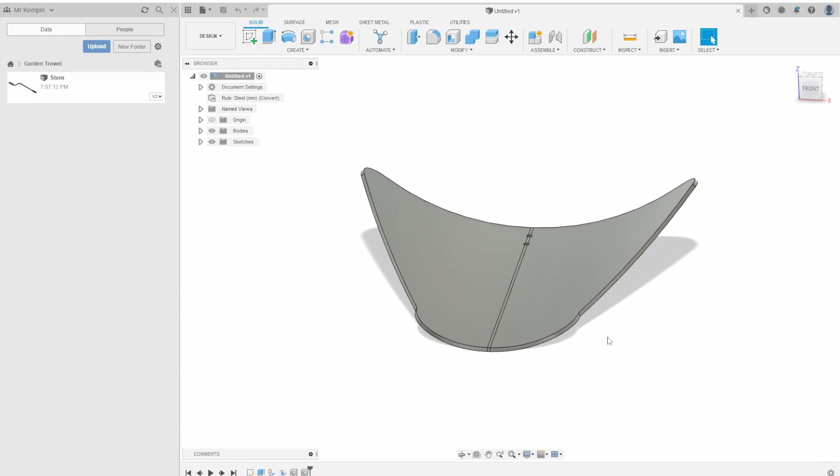This is the second video in the Garden Trowel tutorial videos for Fusion 360, and in this video we're going to be making the trowel blade, the part you see in front of you here. This is going to be one of the more complex parts as it involves using the sheet metal functions of Fusion 360 and incorporating some bends and curves into it, which we're going to edit as well.

So I'm going to start off by creating a new part, and the first thing I'm going to do is save it. In my Garden Trowel folder location, I'm going to call this trowel blade and save that there.

So we're going to jump straight onto the sheet metal functions, and we're going to start a new sketch just like we've done before. I'm going to use the plan or top down view.

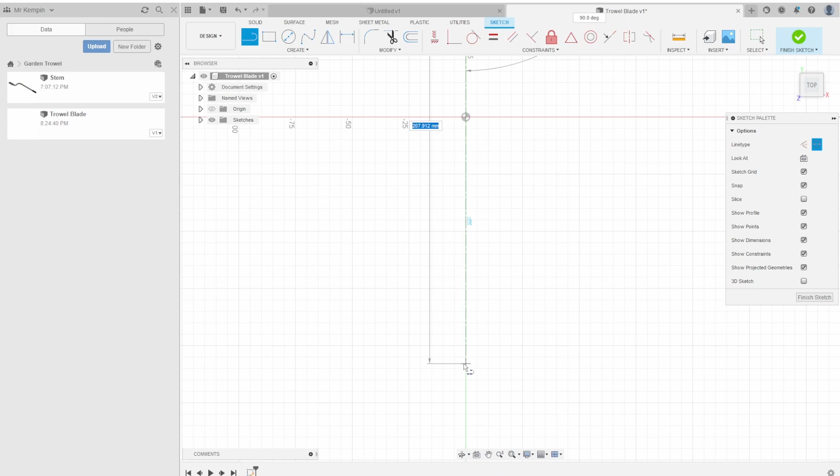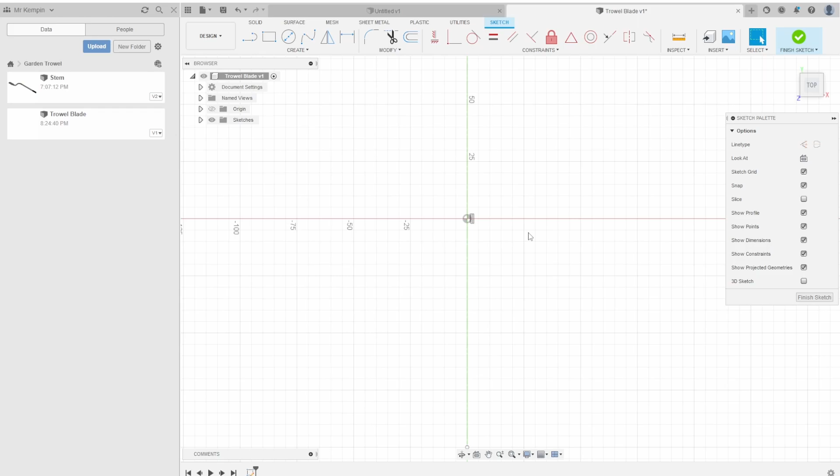The first thing I'm going to do is put in a center line. Using my line tool and selecting center line, I'm going to draw an oversized center line, way bigger than I'm going to need, and place it there. Now I find it very helpful a lot of the time to use the central coordinate system, where the three planes intersect, and I'm going to fix this line to that central axis. So right click on it and press fix/unfix. By doing that, no matter what we dimension to and where from, this line will always remain on that central axis, or aligned to the central plane.

So we're now going to draw the outside frame of the blade. We'll use the rectangle tool and draw a rectangle there, making it 140 across and 145 down. It's not centralized, and that's fine, because our dimension tool, pressing D or selecting up here, from the central axis or center line to the outside line either side. But you notice it says 121.262 when I've only gone halfway, and that does not look like 121.

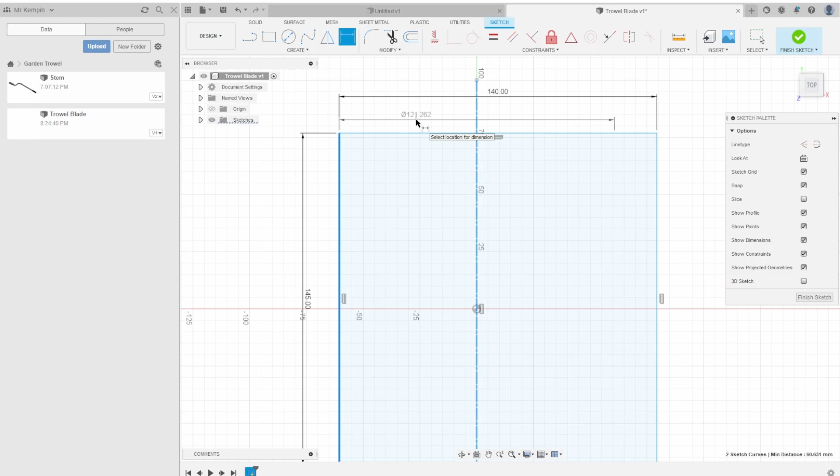But if you come over to here where it's measuring to, it's showing you that it's measuring the diameter, and you've got the diameter symbol there. So the center line will act as the central axis of whatever it is you're drawing, and any measurements to it will assume outer or total width rather than just center width. So I'll press that as 140, and as you can see, all my dimensions line up. 145 I can leave the same.

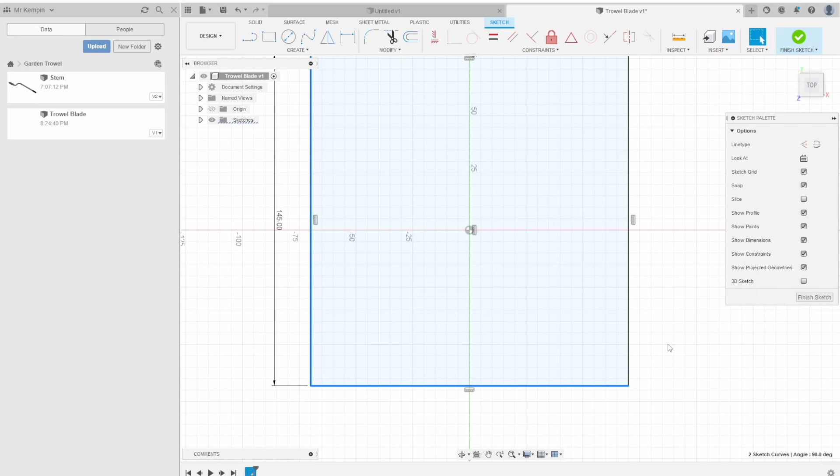I can exit that. I'm now going to click on each of these lines, holding shift in between clicking so I can select multiple lines, and I'm going to select construction over here, so those three lines are going to be construction. The top line will leave as a normal line.

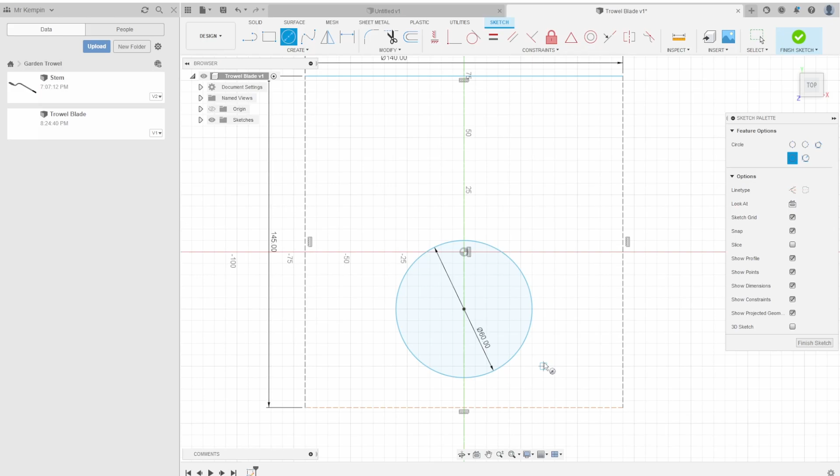I'm now going to jump into my circle tool. I can press the letter C to shortcut that if I want, and I'm going to draw a circle with a diameter of 60, starting the circle on that central line there. Then I'll press my dimensions tool or D, circle to bottom line, and I want this to be the same as the radius, which is 30, and that brings the outside perimeter in line with that bottom construction line.

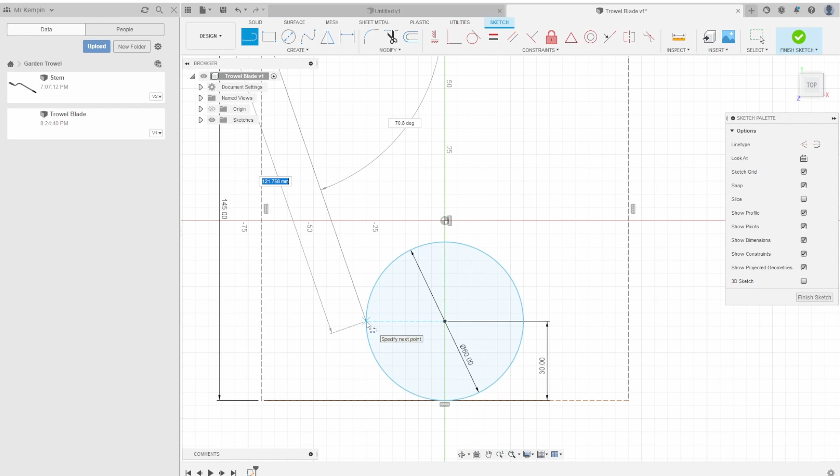I'm going to select my line tool and go from the corner here down to the center, and it should be in line with the center. For some reason it's not showing me in line with the center, and I can't... oh, there you go, now it's allowing me to snap to it. Sometimes you hover across to the center point there and then bring it back, and it allows you to snap. Same on the other side, and because I've got one line on there, it's definitely going to allow it to snap. If this is ever an issue and you can't get this on there, you can use a construction line from the center across to the outside, and that'll give you a point to snap to as well.

We're now going to go to the fillet tool, and we're going to fillet these edges around here to make them nice and round. I'll select that one, and that one, and I'm going to choose 10mm for my fillet, and it does both of them at the same time. I'm going to press the letter T, the trim tool, and trim off these two parts there. That looks like the main shape of our blade in flat form.

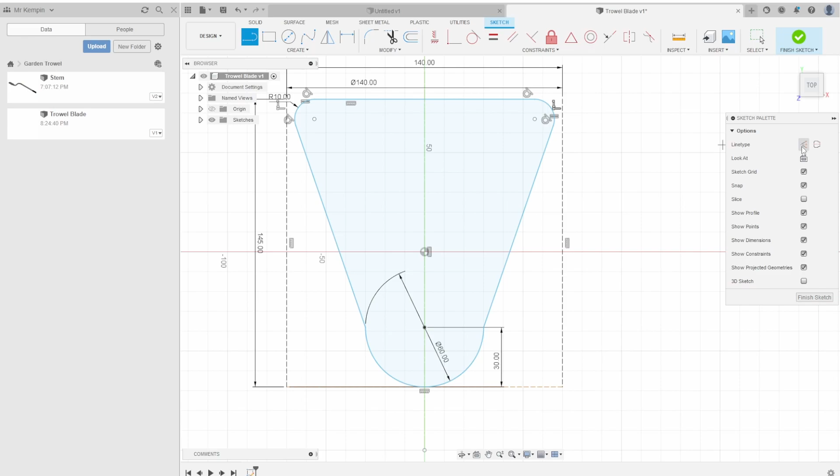However, what we still need to do is add two more center lines, one either side of that center line we've got there, and the reason for that will become apparent when we start doing our bends. So I'm just going to draw them, it doesn't really matter where, as long as they are perpendicular, so parallel to the center line.

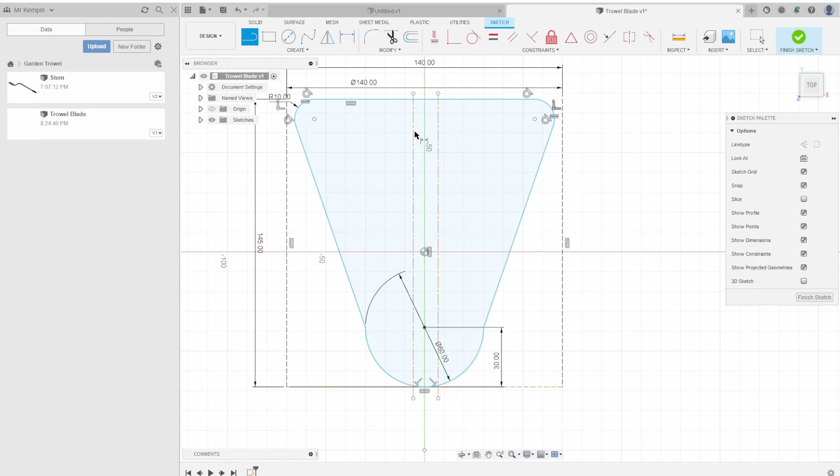And then I do another one over here. They're 90 degrees down, parallel to the original center line. And if I dimension them to the center line, I want them to be a dimension of 1mm diameter. And the same on this side here.

Here we have center lines that are 1mm apart, because the diameter from the center line is 1mm, so the radius will be 0.5, which is that distance there.

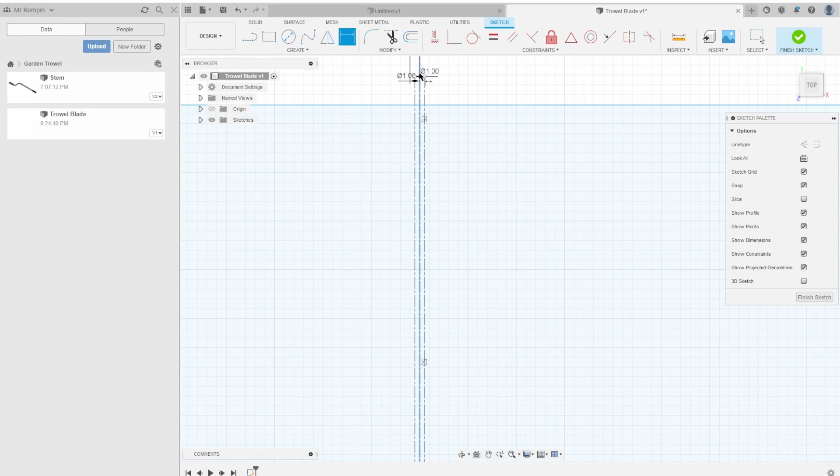I can now exit my sketch and extrude that, and because I've got all these lines here, I need to select all 4 parts. But instead of going up, I'm going to do -1.5. The reason for this is I'm going to make my sketch visible again after this, and I want to keep it visible on the top surface because I'm going to be working on that surface.

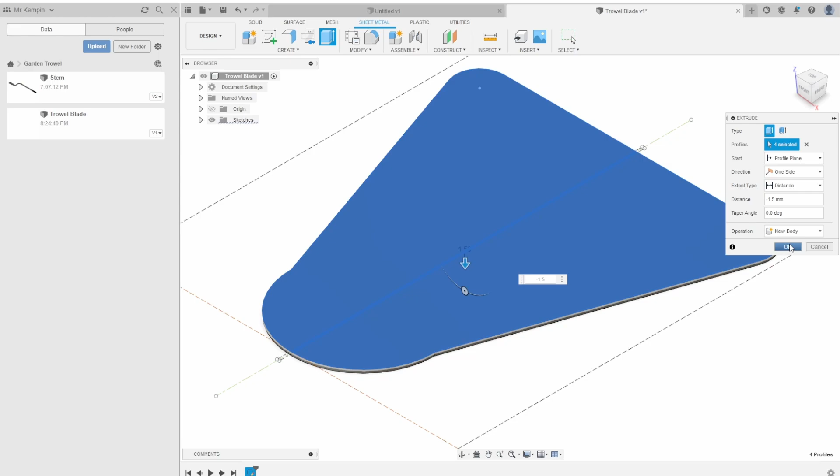So press OK. I need to press create and convert to sheet metal. I'm going to convert this body to sheet metal, and that means the computer is going to recognize it as a piece of sheet metal and allow me to use features such as bends and folds. So it knows I'm using steel, that's the default selection, and it detected a thickness of 1.5.

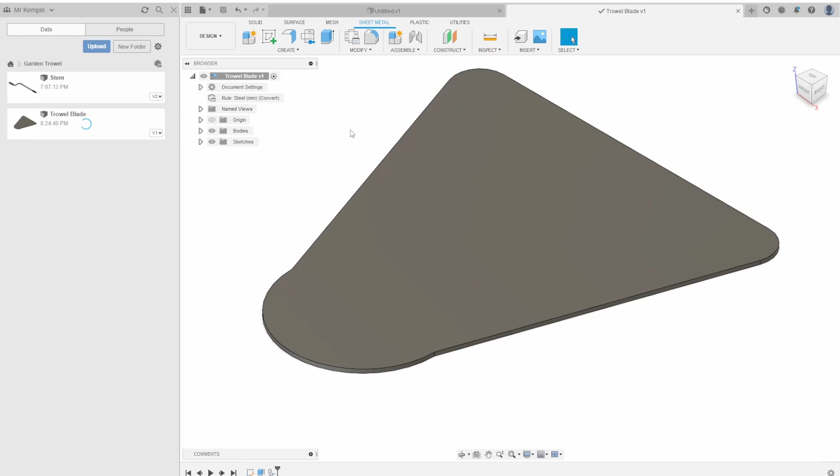Before I go any further, I'm going to press save because you don't want to lose any unsaved progress. So in the sketches, I'm going to make that sketch visible, and that's going to be really helpful for us.

I'm now going to press create and go to bend, and stationary side. Here's the really important bit. Zoom in and click in between these 2 outside center lines. This is really important, we have to click in between them.

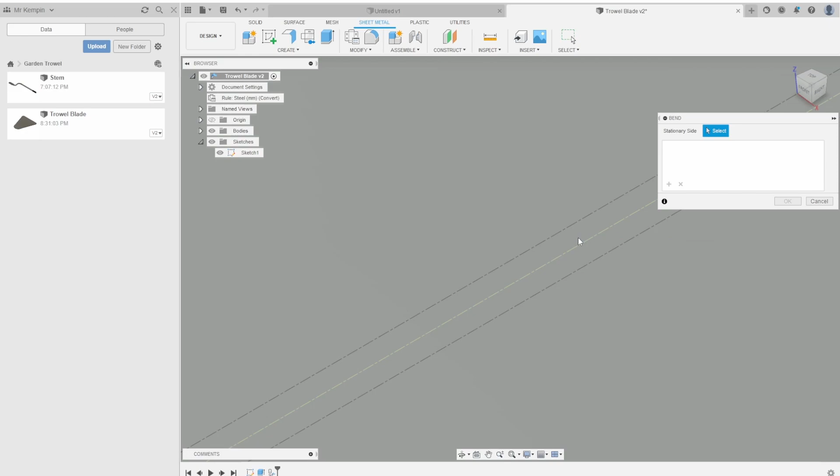It now wants us to add a fold, so I'm going to select one of these lines, it doesn't matter which one. I've selected that one, and you can see how that's bent up at a nice 90-degree angle. Looks very nice and neat, but that's not what we want.

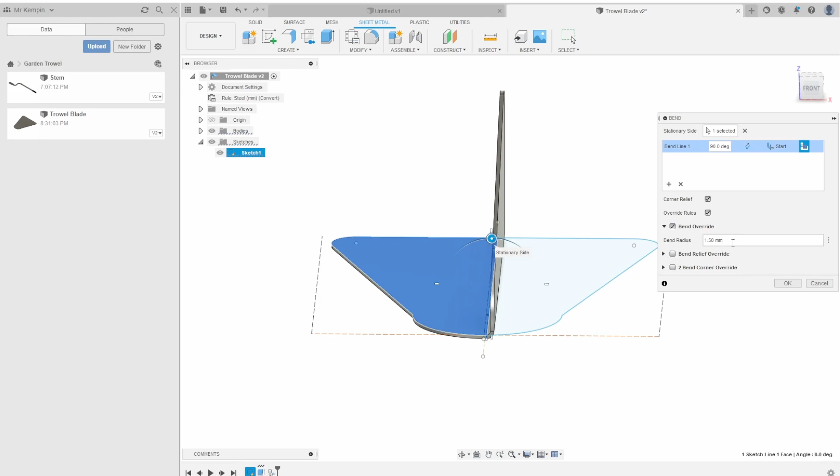I'm going to go to override rules and bend override, and change the bend radius from 1.5 to 88.35, and that gives me a nice sweeping curve.

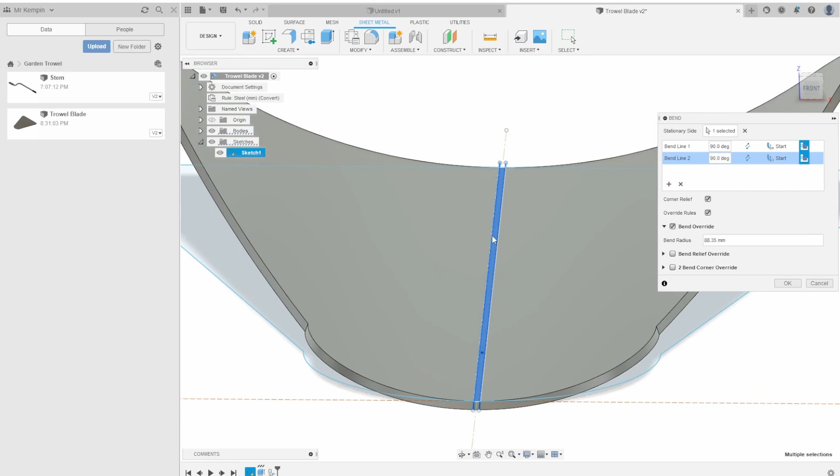I can now add a new selection, and I'll zoom in so you can see. I'm going to put the second bend on this line here, and this is why we selected in between those 2 bits for our stationary side. This flat piece here is staying stationary. That's really important for us because it means we're on the same axis and everything is nice and smooth.

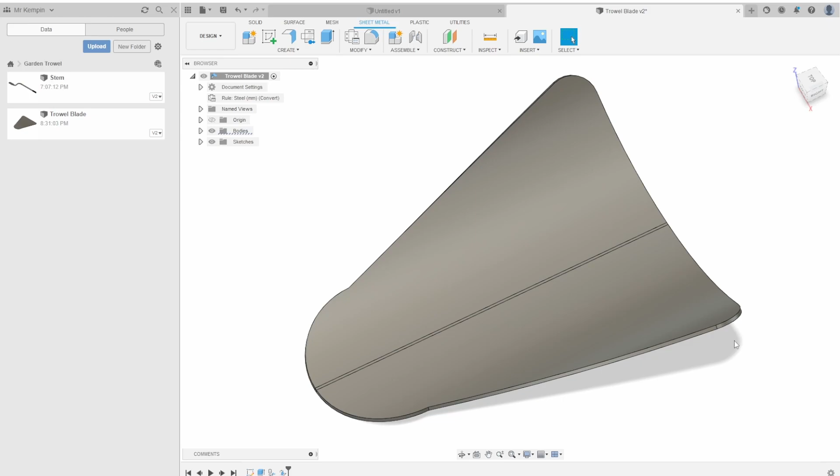I can press OK, and I can now hide that sketch again because I don't need it anymore. And that is the main bulk of what we're doing, done. However, we do need to put 2 holes in it. We want 2 holes here and here so it attaches to the stem.

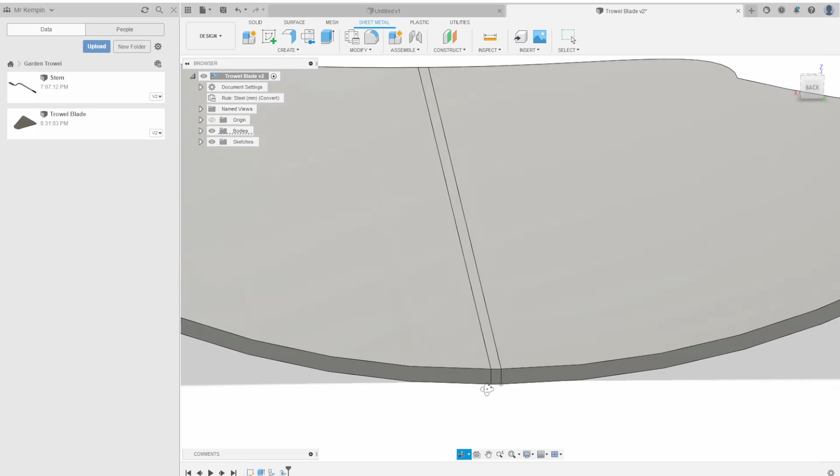I'm going to use the back here to insert the holes. The reason for that is if I insert the holes from the top part here, because it curves up, some of the material will sit above where the hole starts and not be cut away.

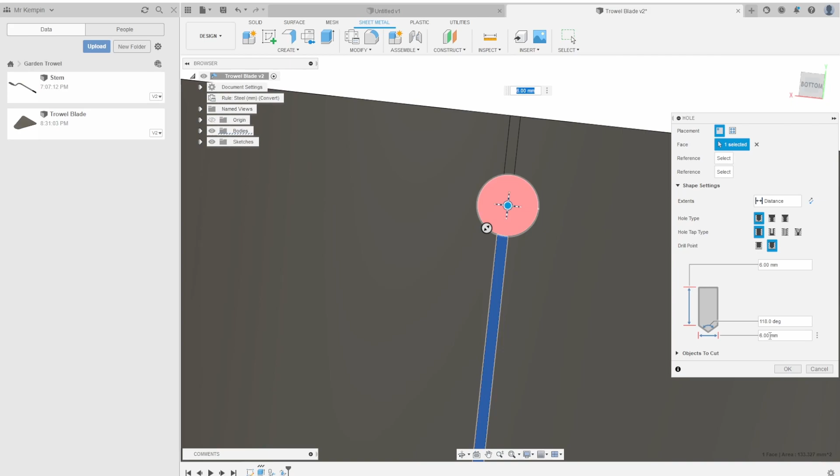So I'm going to rotate round to here, and use the hole tool, so create hole, or the shortcut letter H, and on that surface there I'm just going to click. Like in the video before, let's preset the size of this, so I'm going to set this as 2mm diameter.

Distance to all, and then I'm going to go for my references. First reference of course will be to the end, 10mm. Second reference, I want it to be one of these 2 sides, but it's not giving me the option to select them straight away, because the hole is too close to them, it's overlapping.

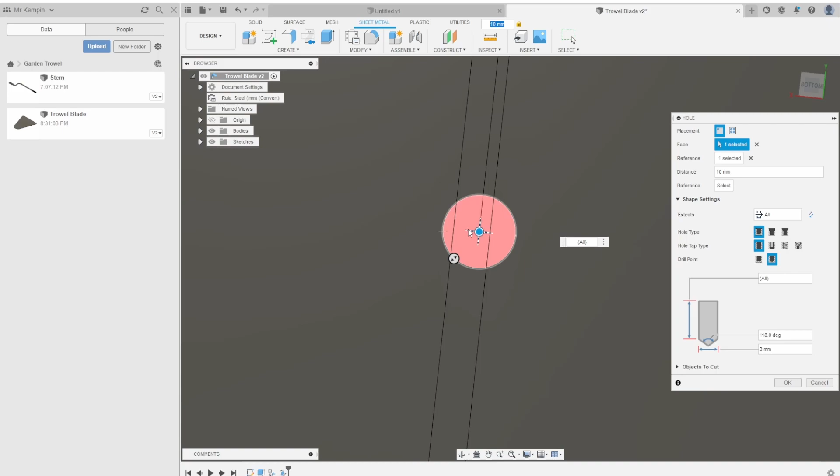So I'm going to drag the hole over to the side, and now I can select it as a reference, 0.5, done.

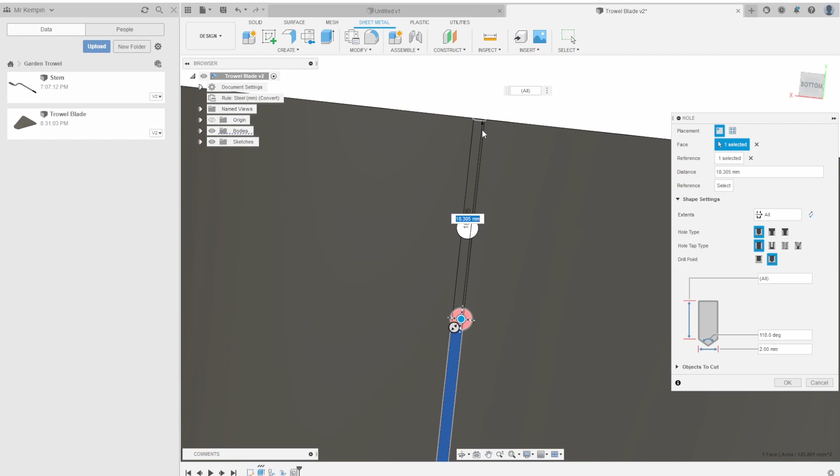I'm going to repeat that process down here. My dimension is set, distance is all, first reference to the end, make it nice and easy, that's 20. Second one, I want to go to this edge here, I can't, so I drag it across, now I can select it. That's because the hole was overlapping with that line, so it wouldn't recognize it as a reference for dimensioning.

There we go, and those are my 2 holes. And that is the main body done.

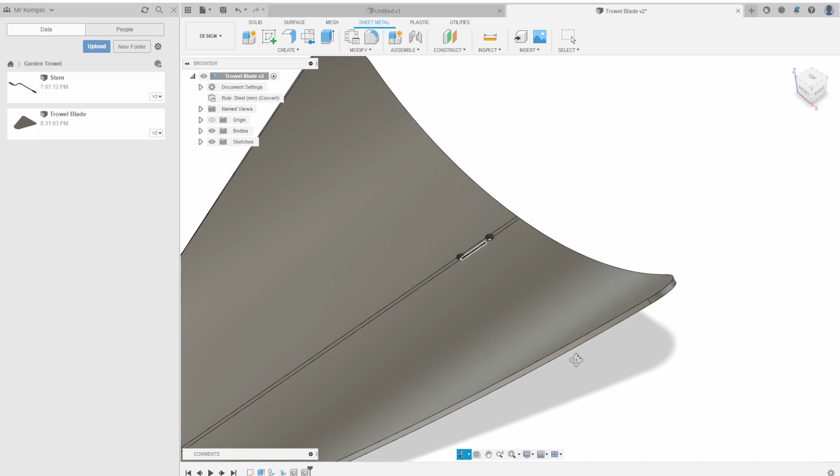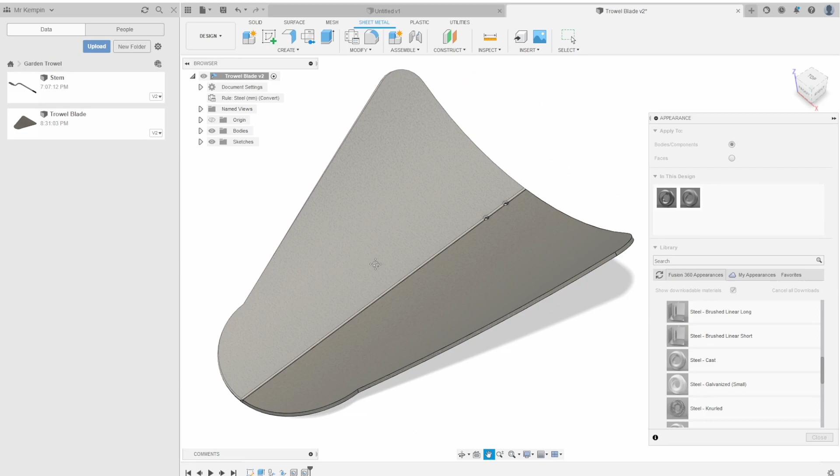The last thing to do is add an appearance to it, so tap letter A for appearance. And if we go into metal and down to steel, I think let's try cast steel on this one. It gives it a nice pitted surface because this is going to be a planished piece, so that's going to give it a nice effect. I think that's probably going to be the best one out of the choices there.

Press save, and that is that part done. Okay, good luck.